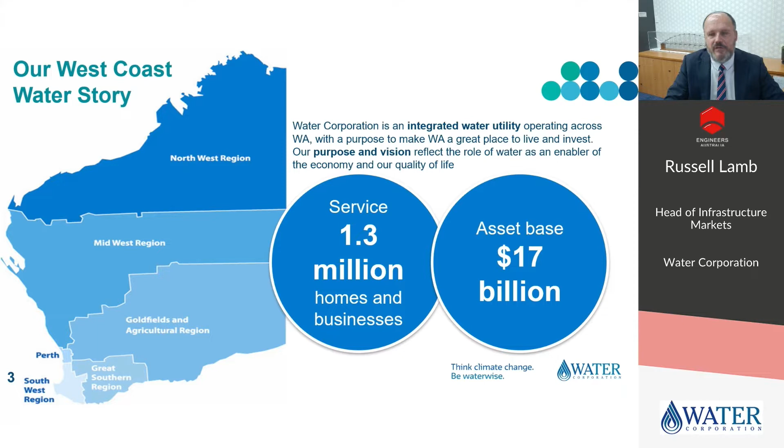The collaboration with Hazer goes to the heart of our purpose. We are made up of a very large integrated water supply scheme, which provides around 300 gigalitres of scheme water per year to about 90% of our customer base across metropolitan Perth, the Southwest, Great Southern and the Kalgoorlie pipeline. In addition, we have over 100 regional water and wastewater treatment plants across WA, which vary significantly in size and availability of source.

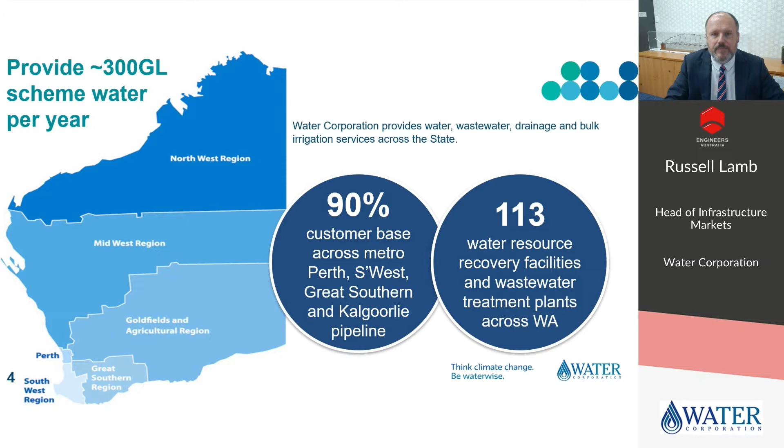On the slide, you can see the location of the Woodman Point Water Resource Recovery Facility, or WRRF, in the south of Perth. Water Corporation has recently changed the names of wastewater treatment plants that beneficially reuse or recycle byproducts of the wastewater treatment process to Water Resource Recovery Facility, which better describes the function as well as the change of perception of wastewater. Wastewater really is a misnomer, and hopefully this presentation will in some way help to explain why that is.

Woodman Point is the largest wastewater treatment plant in the state, currently treating 145 million litres of wastewater per day, with an ultimate capacity of 180 MLD. The plant serves approximately 725,000 people in the south of Perth. The plant consists of conventional, preliminary, primary and secondary treatment processes, integrated with a sludge management facility, which I'll explain more during the drone footage on the next slide.

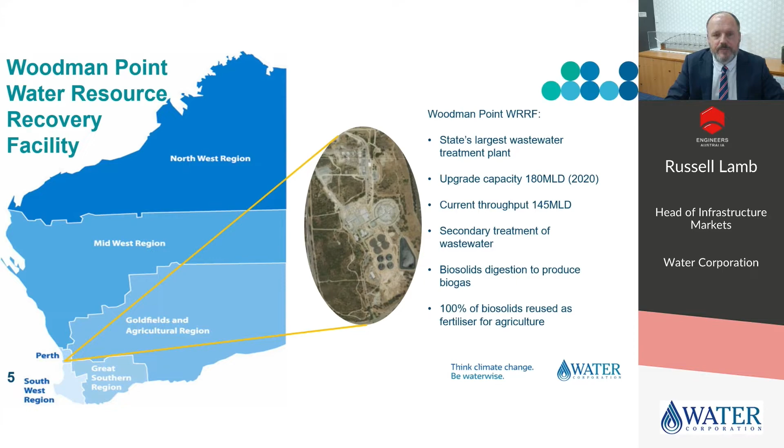Next up, we have some drone footage of the Woodman Point site, and I'll talk you through the different elements of the plant as we go. The footage starts with us at the north end of the site, travelling south.

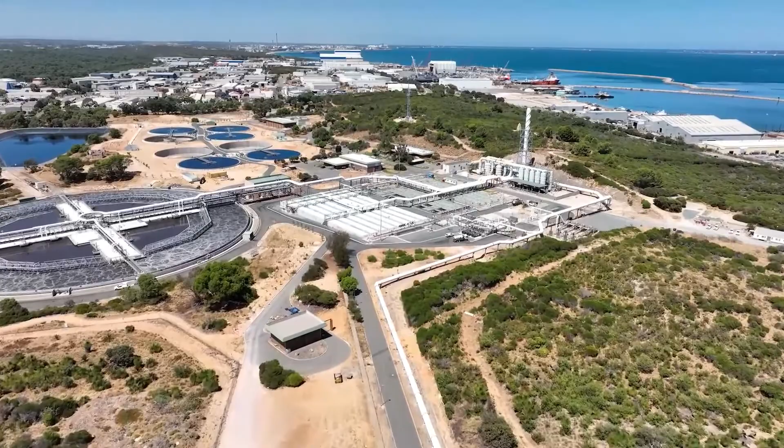We are now approaching the primary settling tanks in the middle of the screen. There are 8 long tanks or channels with a green inner cover and a white outer cover. Maintenance is being undertaken on the 4 tanks to the right.

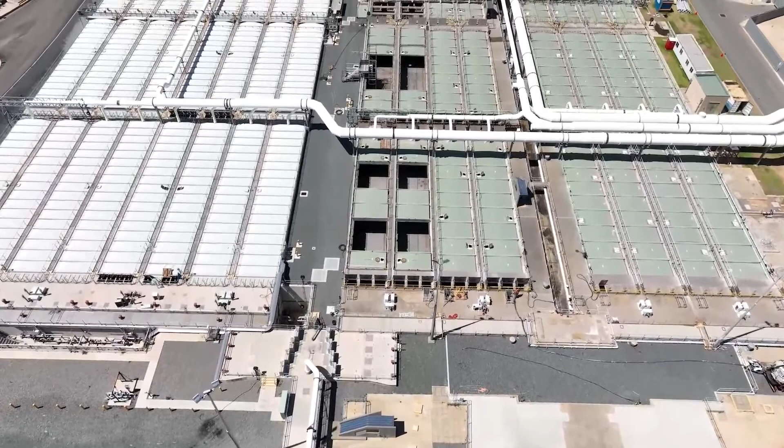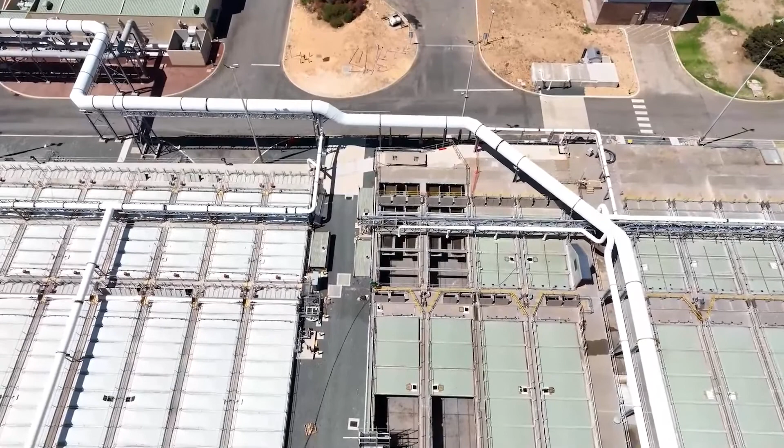The primary settling tanks work by moving the wastewater slowly along the length of the tank, allowing the larger solids to fall to the bottom of the tank, where they are collected by a scraper that pushes all of the solids to one end, where it is collected and moved to the digesters.

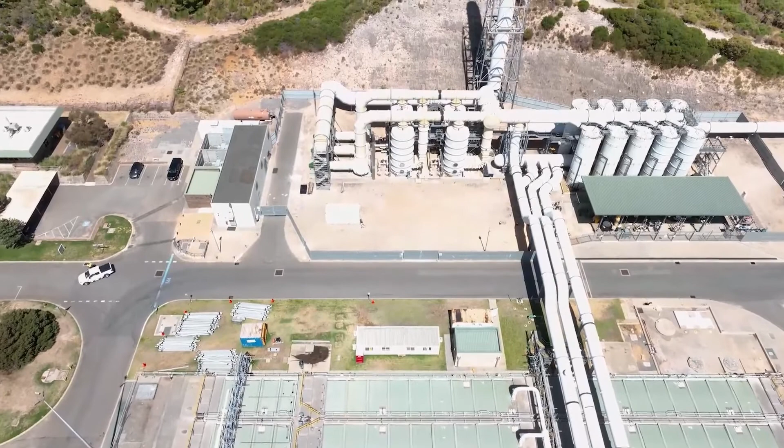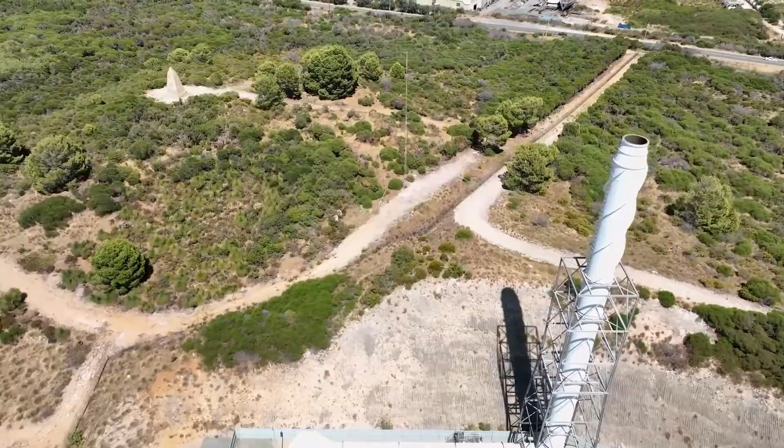Now we are looking at the odour control system that pulls high sulphide odorous air from all parts of the plant. There are 10 bioscrubbers to the right and 4 chemical scrubbers to the left. The tall stack discharges the scrubbed air to atmosphere.

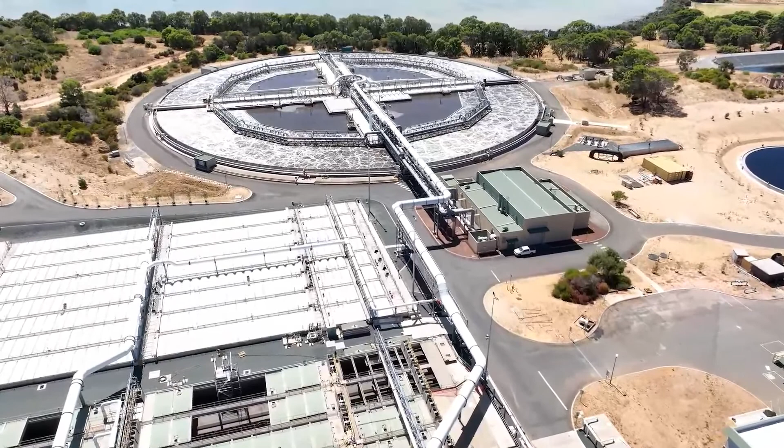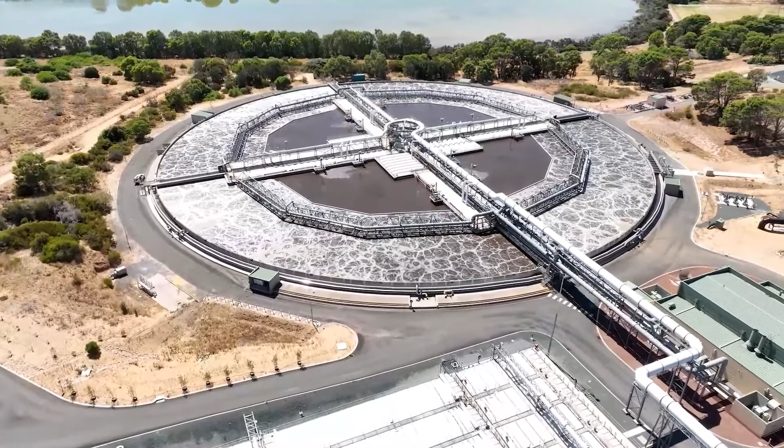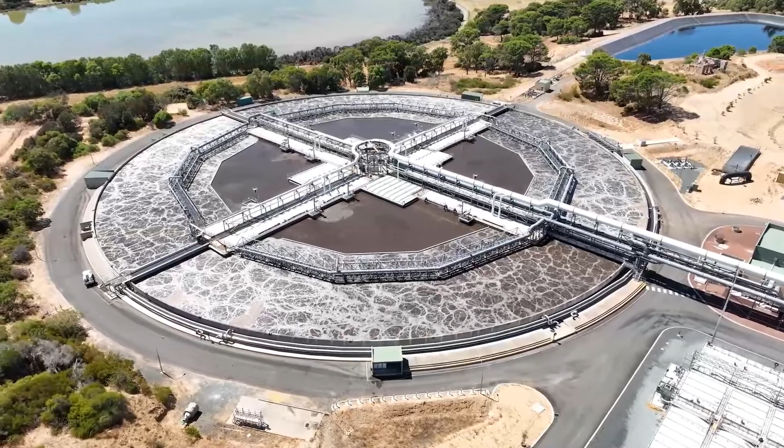Airflow into the mixed liquor is controlled by a feedback loop based upon the amount of ammonia present. High levels of ammonia would trigger more air, and vice versa for low levels of ammonia.

The white ducts extract odorous air from the centre section that is anoxic. The air is taken back to the odour control system we just saw.

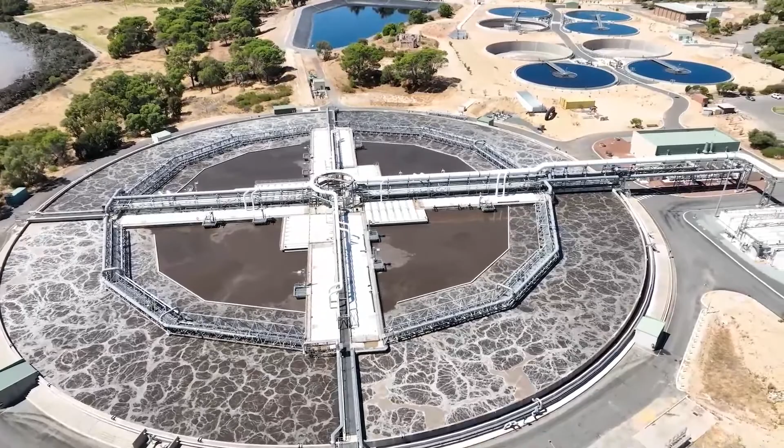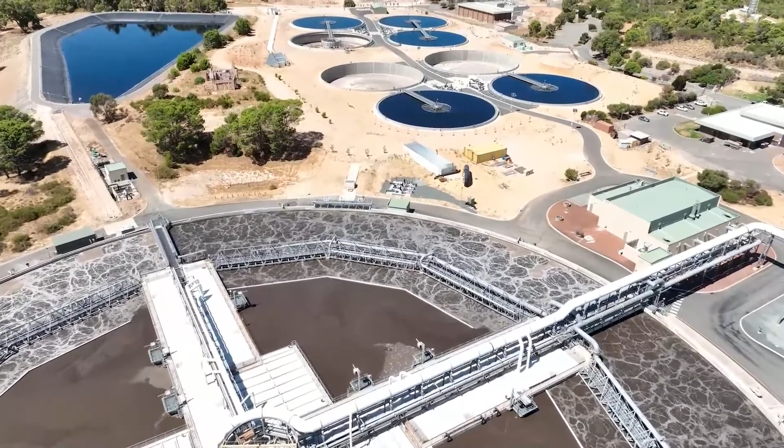The mixed liquor then travels to the 8 clarifiers, which allows the remaining solids to settle out. To provide some sense of scale, these clarifiers are 50 metres in diameter and 6 metres deep.

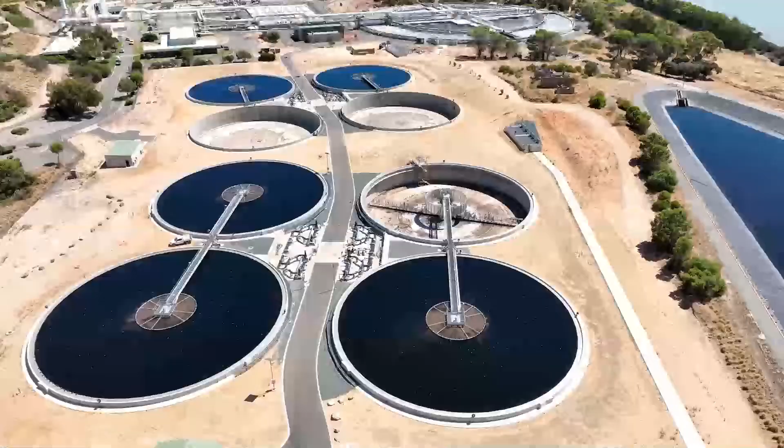You can see the empty clarifier on the right. Solids that settle to the bottom are removed through suction scrapers on the floor of the tank. We also just passed the overflow storage dam on the right.

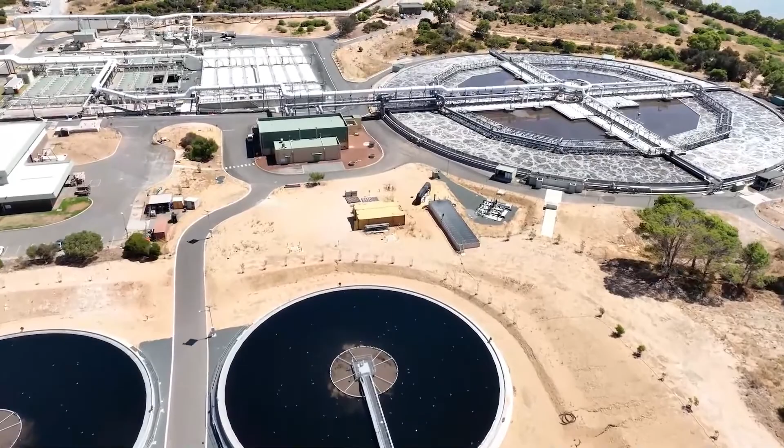We're now travelling north back up to the egg digesters.

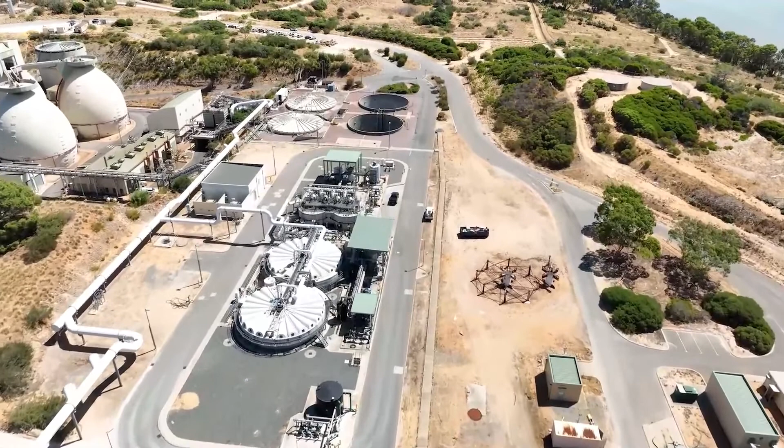The digesters are used to anaerobically digest the sludge into biosolids and produce biogas. To the right, you can see the gas holder and the two flares next to it where excess biogas is burned.

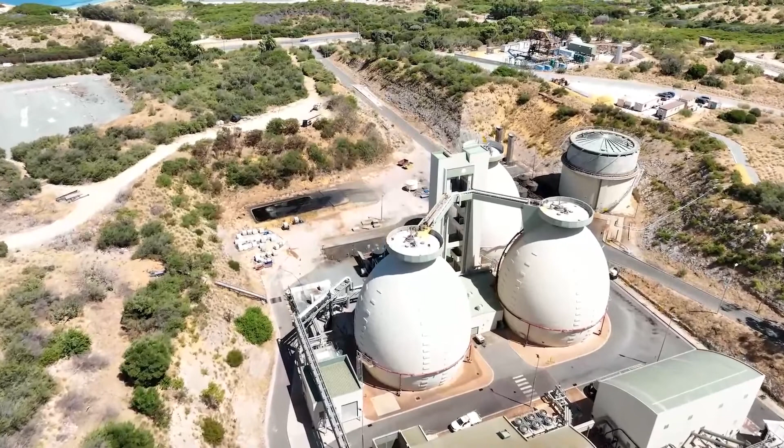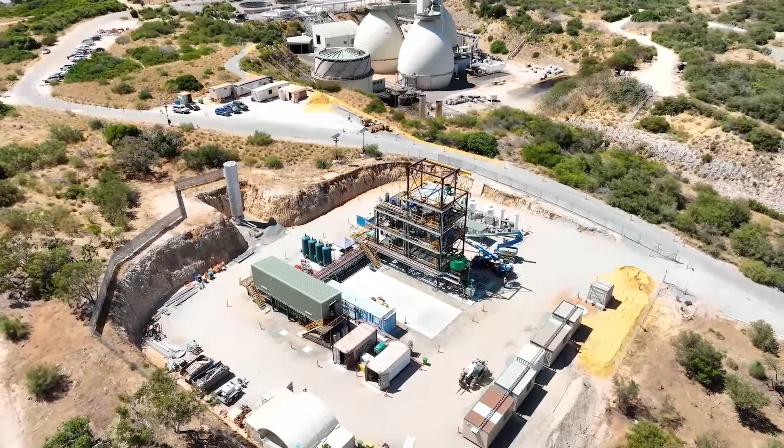We can now see the Hazer plant, which Luc will cover in more detail in his presentation. I hope you enjoyed the footage.

The egg-shaped digesters use anaerobic digestion by bacteria to reduce pathogen loads in the biosolids and produce biogas. The 900 normal meters cubed of biogas contains 60% methane and 40% CO2 plus contaminants, such as hydrogen sulfide.

Due to the process used, it is a renewable source of methane. The biogas is stored in the gas holder at the top.

Under normal operation, the biogas is used as fuel for 3 reciprocating engines, which produce heat in the first instance to heat the biosolids to over 40 degrees C to enable the bacteria to do their work, and also to produce electricity, which is used by the site.

The biogas provides approximately 40% of the energy requirement for the site. Any excess gas is flared to the left of the gas holder.

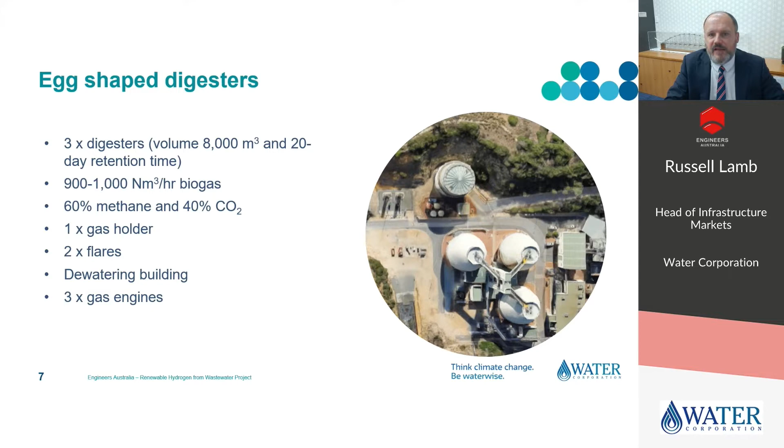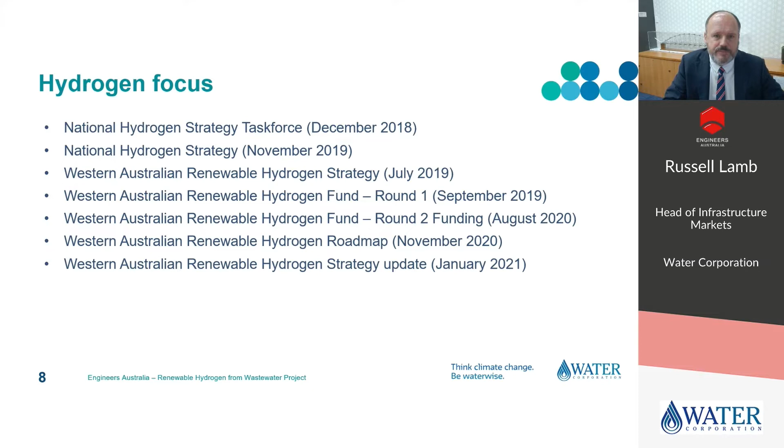Hazer Group approached Water Corporation in October 2018 with a proposal to use the flared gas to produce hydrogen and graphite in the commercial demonstration plant project.

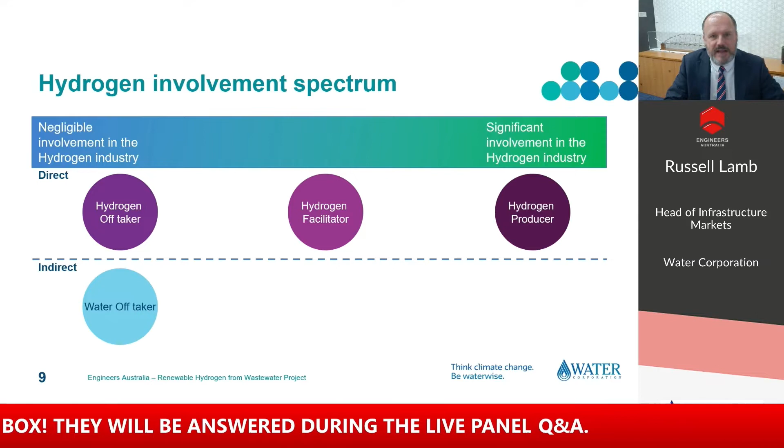The Hazer technology is different to conventional technologies to produce hydrogen, such as electrolysis and steam methane reforming.

The Hazer process does not require large quantities of water as feedstock and for cooling, nor does it produce carbon monoxide or dioxide. The technology uses thermocatalytic decomposition of methane present in the biogas using iron ore as catalyst, but more of that from Luc later.

Looking at the emerging hydrogen industry in general, the corporation could play a role in a number of areas, both directly and indirectly.

Considering how the corporation could be directly involved, first as a hydrogen off-taker, the corporation could replace diesel consumed by our vehicles and diesel generators with hydrogen. The corporation consumes almost 6 million litres of diesel per year.

The corporation could become more involved by leasing land and providing water or biogas to an industry proponent as a hydrogen facilitator. The corporation is one of the largest landowners in the state, requiring land for current and future infrastructure.

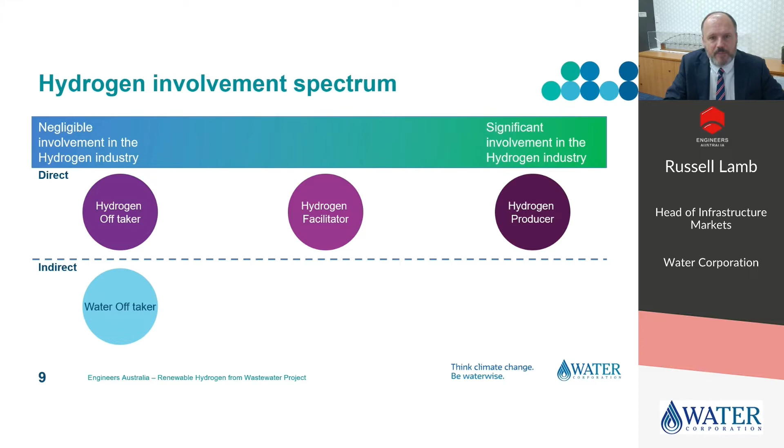So, why is the Water Corporation involved in the Hazer project? Through the agreements with Hazer, we sell them biogas, thereby generating revenue for the corporation. By not flaring the biogas and producing hydrogen and graphite, we avoid production of CO2, which is good for the environment.

A good way to keep abreast of the latest developments in an emerging industry is to do a project in the sector. Through the collaboration with Hazer, we have kept up to date with the latest developments in the hydrogen industry.

Being involved in the Hazer project demonstrates our innovative thinking to our stakeholders, customers, and owner, which we'll all appreciate as being an important thing to do in this day and age. In addition, being involved supports the strategies detailed on the previous slide, so we demonstrate that we're a good corporate citizen for the state of WA.

The ready availability of hydrogen at our sites could help Water Corporation decarbonise its supply chain. We could convert our trucks and utes to hydrogen fuel cells to reduce diesel consumption. Also, we could replace diesel generators in drinking water catchment areas with hydrogen tanks and fuel cells to remove the hydrocarbon contamination risk.

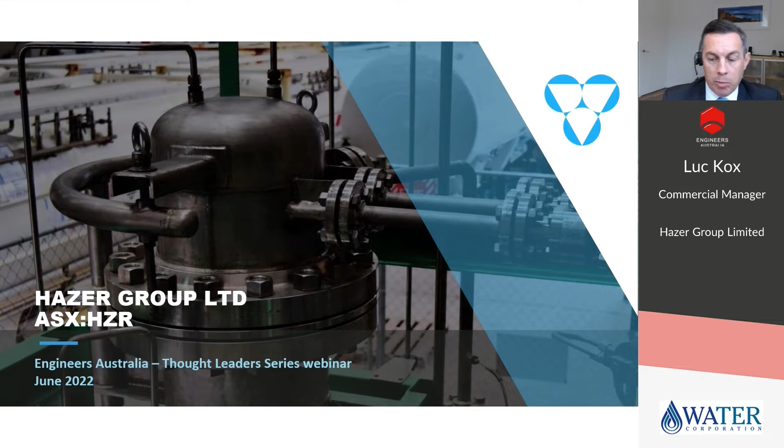So Hazer Group Limited is a technology development company focused on the commercialization of the Hazer process. We're listed on the ASX, and that's why I'll have to show you this slide as a disclaimer. In brief, it says that I'm not a financial advisor. If you believe you need to seek financial advice, seek it from a professional. Otherwise, we would welcome your support as a shareholder of Hazer.

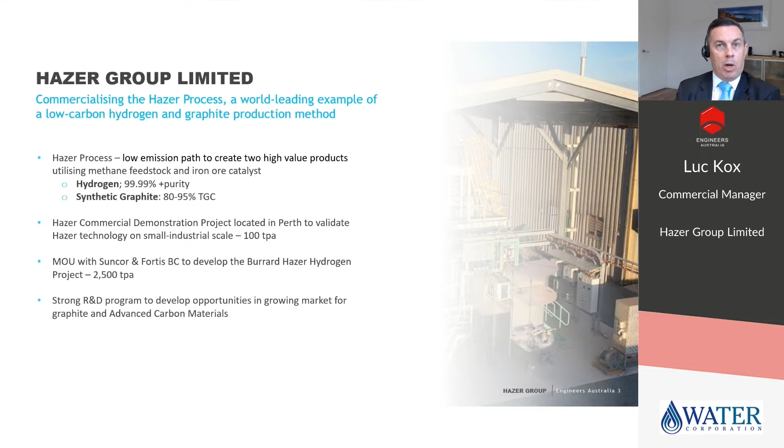In today's webinar, I'd like to talk about four topics. First, an introduction about the Hazer process. Then the focus will be on the Hazer commercial demonstration plant, which Russell already indicated. I'd also like to briefly touch on a proposed project in Canada that we're working on, and then provide a brief introduction on our research and development program around our graphitic carbon product.

So why hydrogen? Russell has already given an introduction on what's going on in Australia in recent years, especially since we started our conversations back in 2018. The conversations between Water Corporation and Hazer started for this project. But in recent years, there's been an enormous evolution and development of interest in hydrogen globally. I think it's fair to say that...

It's widely accepted that decarbonization needs to happen. We need to decarbonize our energy consumption and usage. It's also widely accepted now that hydrogen will play a very material role in that. Last year, the UN Climate Change Conference, or COP26, reaffirmed the global commitment to reach net zero emissions by 2050, and around 75 countries have now signed up to reach those targets for decarbonization. Hydrogen will play a major role in that, in particular in sectors or industries that are traditionally hard to abate or decarbonize. Examples of those are heavy industries, steel making, manufacturing of chemicals, and heavy transport.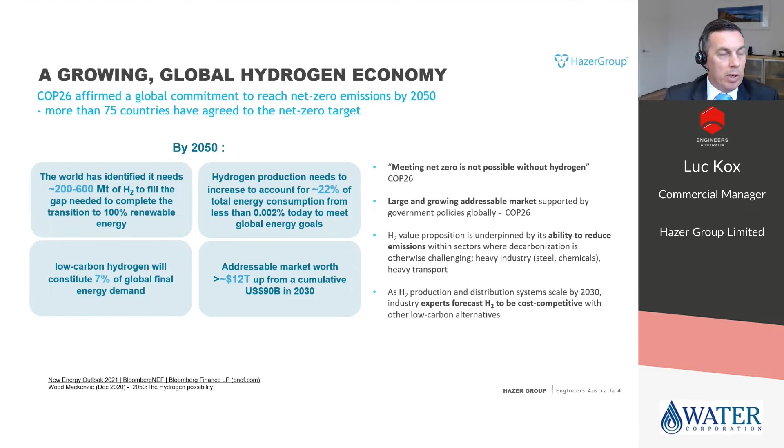What many people don't realize is that hydrogen is already used in a lot of industrial applications. Examples of that are the refining of petroleum and the production of fertilizer. This is typically done with a process called steam methane reforming, where a methane molecule, CH4, is split into the hydrogen people are after, but it also comes with a significant emission of CO2, which is obviously undesirable if we're wanting to decarbonize.

A process that currently has been obtaining a lot of interest and excitement, in particular in Australia and other countries blessed with abundant renewable resources, is the splitting of water through electrolysis - splitting water into hydrogen and oxygen. That is a technology that does require a very significant amount of renewable energy to make this low emissions hydrogen.

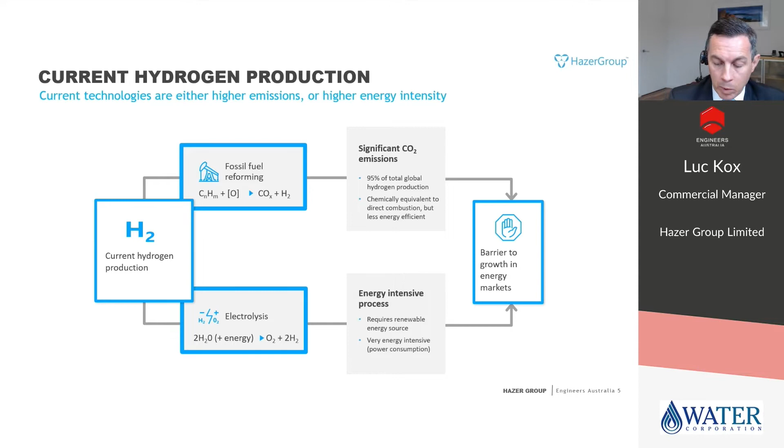Enter the Hazer process, what we're here to talk about today. The Hazer process is based on a process called thermocatalytic methane decomposition, or the splitting of methane over a catalyst. So we start with a methane molecule consisting of CH4, carbon and hydrogen. Through the Hazer process, we convert that methane to hydrogen and graphite as a solid carbon. There's no CO2 emissions from the process as such; rather, we convert the carbon to a solid carbon product.

So it's an inherent form of carbon capture and storage, or carbon capture and utilization, if you like. Thermocatalytic methane decomposition is not new as such. What happened, though, is that universities and companies working on these technologies were using more and more exotic materials as the process catalyst, which made it more and more expensive to produce the hydrogen and graphitic carbon product. So the most novel thing about the Hazer process is the use of an abundant, relatively inexpensive iron ore product as a catalyst - a very Australian, or very WA, approach as well.

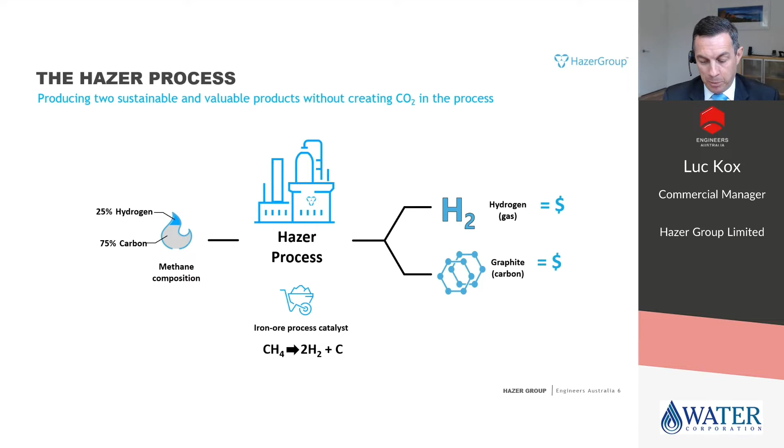That brings me to the history, and this is where I'd like to spend a bit of time to talk you through the evolution of the technology in recent years. Hazer, this is a fun fact, actually stands for Hydrogen and Zero Emissions Research, which was the placeholder for the research conducted in the early 2000s at the University of Western Australia, headed up by Dr. Andrew Cornejo, my good colleague here at Hazer, who is currently our CTO, Chief Technical Officer. He conducted his PhD research on what is now the Hazer process.

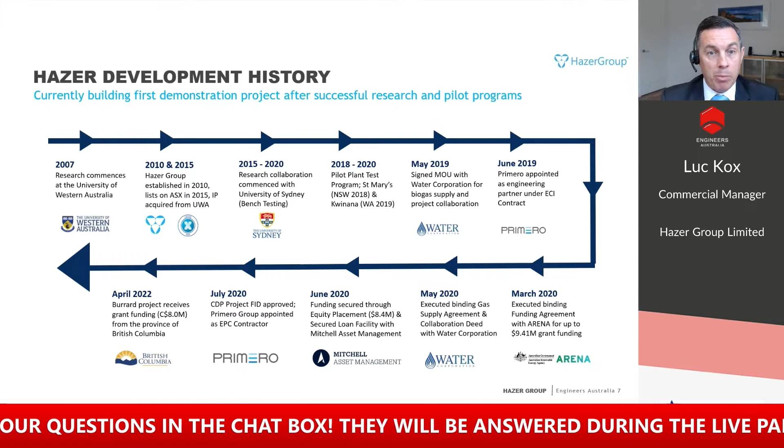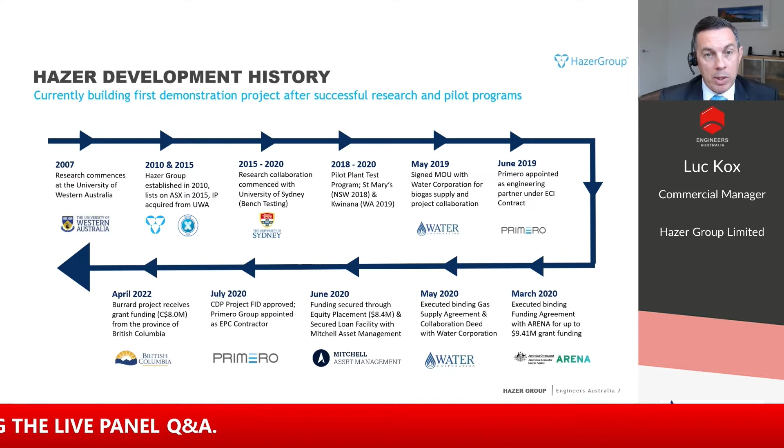So the company was formed in 2010, with all the intellectual property rights transferring from the university to the company. The company listed on the Australian Stock Exchange in 2015, which is relatively early, considering at that point only limited research had been done. In the years following, from 2015 onwards, bench testing was conducted at the University of Sydney, and that evolved into pilot plant testing at St Mary's in Sydney, and later on in Kwinana in 2019.

By that time, after those pilot tests were successfully concluded, Hazer decided to develop the next scale project, to scale up the technology and demonstrate the potential to do so. This is where the commercial demonstration plant project was initiated, and where our collaboration with Water Corporation started, as Russell just mentioned in his presentation. In late 2018, Russell and I got together and started discussing this potential project. That evolved into signing an MOU in May 2019, and that's where the project started to become a real project.

Fast forward a little bit through the course of 2019. We successfully applied with the Australian Renewable Energy Agency for grant funding for this project, receiving $9.4 million from ARENA. Then we executed the binding collaboration agreement with Water Corporation and a gas supply agreement, in which Water Corporation supplies the biogas to Hazer for operation of the plant. That was all necessary for us as Hazer to announce the final investment decision in July 2020. So that's when the project was finally announced to go ahead.

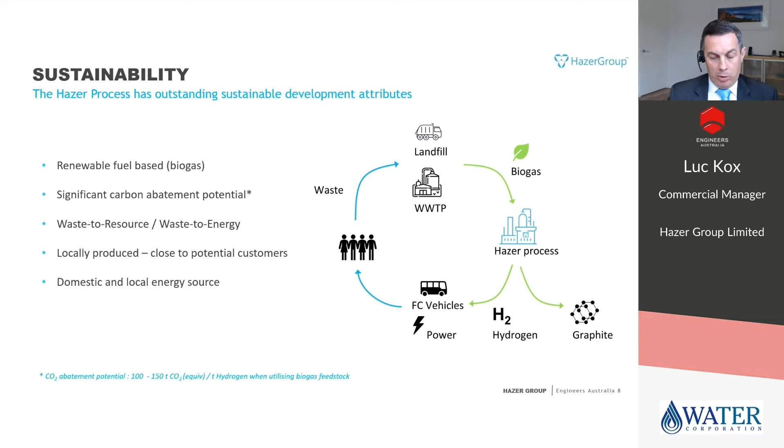So that's where the conversations with Water Corporation started and resulted in the project that we're talking about today, the Hazer Commercial Demonstration Project. The plant is located at the existing wastewater recovery facility at Woodman Point here in Western Australia, in the southern metropolitan area of Perth.

As Russell has shown you a video of the site, our plant is located on the premises, on the site of the Water Corporation. So we're very grateful for this collaboration with Water Corporation. I have said this many times, Russell, and I'll say it again - it's been a true pleasure working with yourself and many others in the Water Corporation. As Hazer, we are very grateful for the support and the facilitation of our project to enable us to take a next step in our development.

So to go into the detail of the project, the hydrogen production capacity is approximately 100 tons per annum of hydrogen. To give you an idea, that's enough fuel for approximately 15 buses. So it's not insignificant - it's a good size for us to step up from pilot to demonstration as a stepping stone to first generation commercial scale plants. In addition to hydrogen, it will produce approximately 380 tons per annum of graphitic carbon product, and I'll go into that a little bit later on.

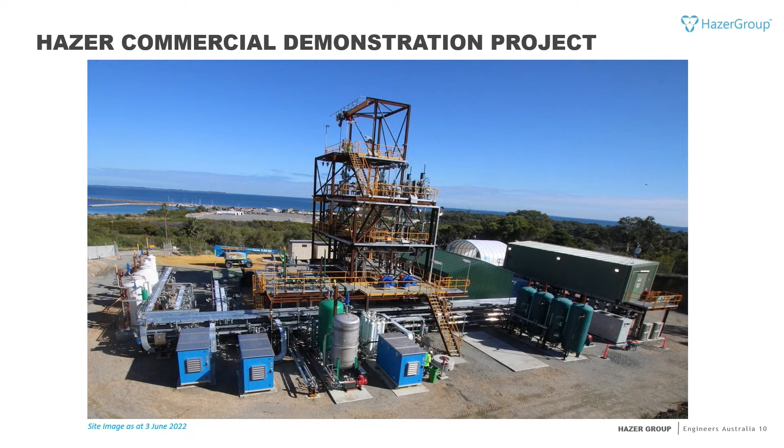Now onto the Burrard Hazer hydrogen project. This is a proposed project that we announced during the year in February and April 2022 respectively. We're working together with two very well-established partners for that project, Suncor Inc. and Fortis BC, both very established energy companies in British Columbia, Canada. The project focuses on a 2,500 ton per annum hydrogen production facility that will also produce approximately 9,000 tons per annum of graphitic carbon product.

The feedstock will be natural gas supplied by Fortis BC. The hydrogen will be injected into the natural gas distribution grid. We're very pleased to be working with these professional, well-established partners for this project. We're also pleased that we successfully collectively applied for funding with the province of British Columbia. We secured 8 million Canadian dollars out of a budget of approximately 11 million Canadian dollars for the pre-FID activities of the project.

Pre-FID means pre-final investment decision. This covers things like the initial feasibility study, the front-end engineering design work, permitting, and the assessment of how to blend the hydrogen into the natural gas system. So that's all coming together very well. As an indicative timeline, I can confirm, as we've previously announced, that the initial feasibility study has already commenced earlier this year. The project group is targeting a final investment decision for this project in mid-2023, and the ready-for-startup date is a target of 2025.

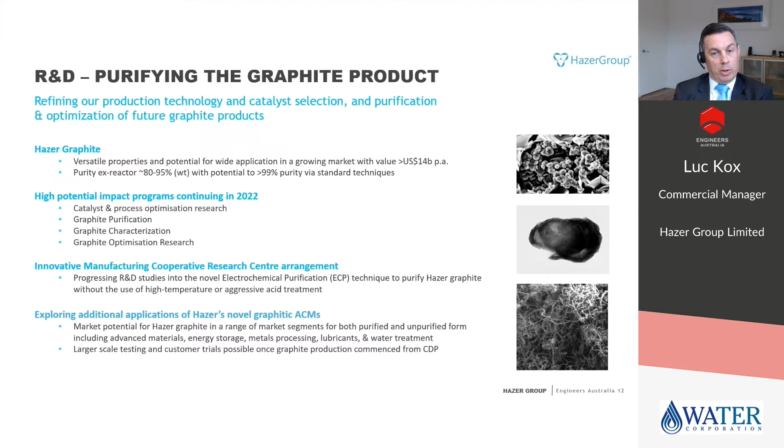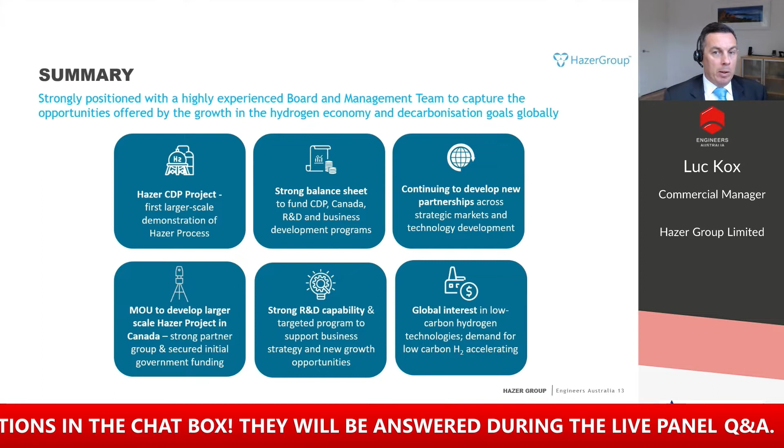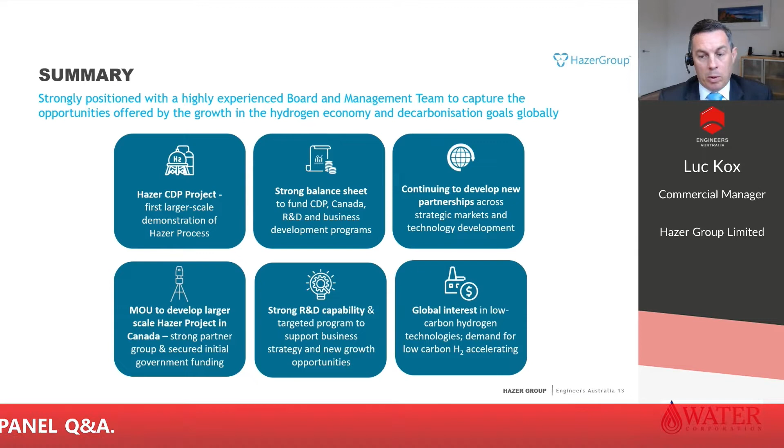As a summary, hopefully I've been able to give you an introduction on the Hazer technology, focused on the commercial demonstration project together with Water Corporation. I've told you about the MOU in Canada. We continue to focus on research and development as the core competence in our company. And with that, I'd like to wrap up my presentation and move on to the Q&A session.